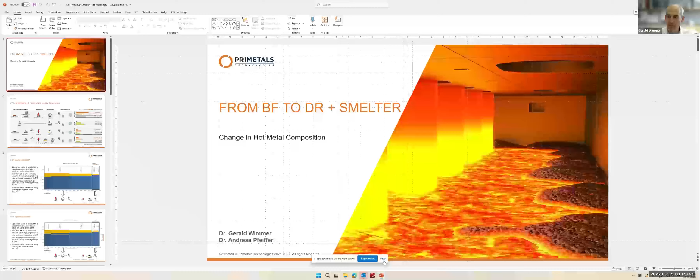Thanks, Mike, for the kind introduction. I will share my screen with you. Just a quick check—can you see my screen in full presentation mode? Yes. Excellent. Let's get started with today's topic: synthetic hot metal from the smelter.

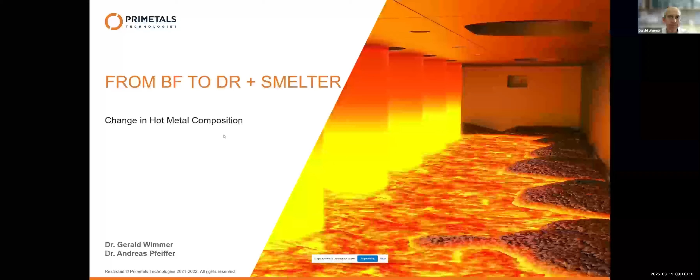As this is quite a new topic, the smelter, I think it's a good investment to spend some minutes on an introduction. Why are we doing all this? Is it getting easier? No. Is it getting cheaper? No. The only reason we are entering these new fields—and we will see later there is quite an R&D effort necessary to prove all these assumptions.

There is quite a change coming up in the steel plant, and that is the CO2 emissions. That's why I always like to start with this slide, which all of you know in one form or another, simply summarizing the ways that we can make steel. If you look at the very first line, the dominant way steel is produced today, via the integrated blast furnace route, we have to say this is the best, most efficient, cheapest way to make iron and steel, but it has very high CO2 emissions, as we can see here on the orange bars.

And only due to the move that our society has decided—and I think this is a very important move, though it's questionable if we are moving fast enough.

In order to do this move, we have to find solutions to reduce CO2 emissions. Carbon capture and storage for the blast furnace could be one option, but seems not the most promising one. That's why we end up, after recycling all the scrap available in the electric arc furnace, still using iron ore for iron production, ending up in direct reduction feeding into an electrical furnace. The common way we do this today is classical direct reduction, mainly shaft technology, feeding into an electric arc furnace.

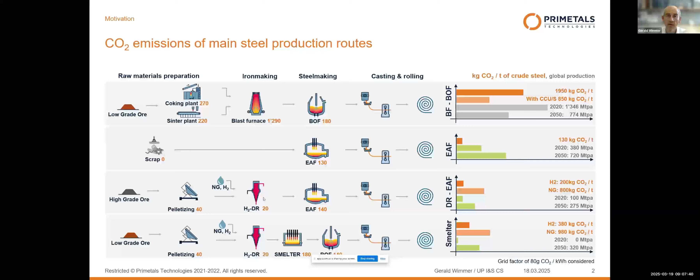Why can't we do this on a large scale? Because there is a shortage in the iron ores. This is the second message I would like to convey with you: the electric arc furnace is a proven, simpler solution to use direct reduced material and make steel out of it. But the electric arc furnace needs high-grade iron ore.

Here is a global map of the iron ore shipped around the world, an incredible amount of 1,500 million tons. On the vertical axis you can see the iron content of this ore, in yellow the gangue, and in white the oxygen bonded to the iron oxide. We see we have excellent iron ores with very low gangue content, and other iron ores of lower grade with much higher gangue content.

If we charge all of them to the same electric arc furnace, we see the very high-grade iron ores fit very well because they end up with a reasonably low slag amount of some 180, 200, 240 kilograms. While the other iron ores, mainly those here in the center, almost all the Australian iron ores belong to this section, would lead to a very high slag amount in the electric arc furnace, and high slag amount always means low productivity and low yield.

That's why today we are fine: these low-grade iron ores are used in the blast furnace, and the electric arc furnace guys use the high-grade iron ores. Also important to remember, they are willing to pay this DRI premium. So these high-grade DRIs are sold by the miners at a higher price, and there is even a market index for this. The electric arc furnace guys are happy to pay this premium because it makes the operation of the furnace cheaper.

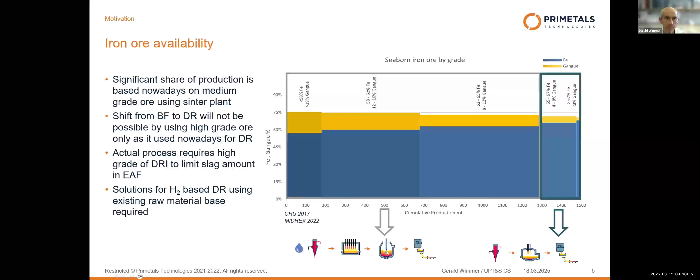For refining, we use the existing refining aggregates if available, the BOF converter. But it requires operating two aggregates.

So the last point for the introduction is a cost comparison. Does it make sense to run two aggregates instead of one? We made this process calculation, as we are a bit lazy, just for two grades: a low grade iron ore with 62% and a high grade with 67%. If we now look at gray on the electric arc furnace, we see for the electric arc furnace it's getting cheaper, my total costs, if I use high grade iron ore.

So if we spend more money for high grade iron ore, the operation costs for the electric arc furnace - mainly electricity, lime, and yield losses - are decreasing a lot. And in the end, it's getting cheaper if we use this high grade iron ore. And this, I think, reflects well what we see on the market.

There are already several plants operating direct reduction shaft, feeding directly into an electric arc furnace, and all these plants are using high-grade DRI. Basically all direct reduction plants today are producing high-grade material.

When we look now at the two-step process, smelter plus BOF, and calculate the costs for both aggregates, we see, of course, also here high-grade iron ore is more expensive than low-grade iron ores. But in total, we see that the costs are decreasing. So for the smelter, it's better to benefit from cheaper raw material. That's the principal idea of this two-step process: let's use cheap raw material and save costs here.

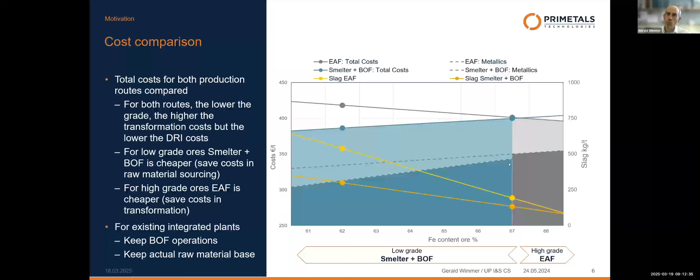What does this predict for future market prices? We see a lot of electric arc furnaces and direct reduction plants being built at the moment, so the demand for high-grade iron ores will go up in the future for sure. The price difference between low-grade and high-grade ores will increase further. That's why we predict the competitive advantage of the smelter using cheaper raw materials will increase in future. And it's not only our idea—there's a very recent paper from Australian researchers.

Australia has a lot of iron ore, and most of it today goes to the blast furnace. So for the big mining companies and shareholders, but also for Australian society, there's a big question: what's the value of our iron ore in future if the blast furnace has to be replaced by green alternatives? That's why there's a lot of R&D and demo furnaces going on in Australia. One recent paper, which you can find on the web, basically shows the same thing—that for low-grade iron ores, the smelter is cheaper than the electric arc furnace, but for high-grade iron ores, it's turning around.

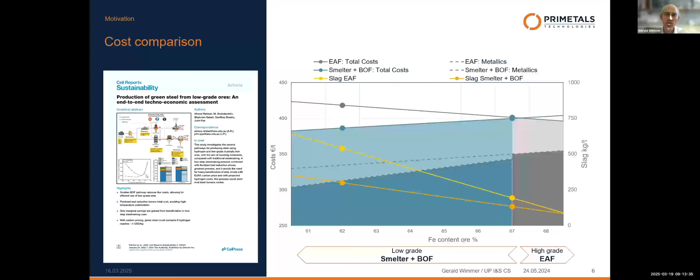That's the principal introduction—why we are developing this new process, and why we think it's necessary. Now we'd like to go into more detail and look at the result of the smelter: what material do we get out, and what is the difference compared to the blast furnace? Before that, we should look at how the material is produced in such a furnace, because this will affect the material properties.

Here you can see a simplified process picture of how such a smelter is operated. One important thing, very different from the electric arc furnace, is that we have no arc formed between the electrode tip and the metal. We have either short arcing, so-called brush arc, between the electrode tip and the slag, or we operate with an immersed electrode, giving just resistance heating of the slag. We have very big slag baths in the furnace—we need a certain slag height for the slag resistance—and a very big pool of hot metal. We charge material to the electrodes because their temperature is highest.

If we have arcing, some radiation is present and we melt more material, but we also charge material to the side walls. This protects the refractory, supports the formation of a freeze layer, and increases refractory lifetime. These furnaces are so big, holding hundreds of tons of metal and several hundred tons of slag, that it's quite an effort to drain the furnace for maintenance or relining. That's why, similar to the submerged arc furnace, these furnaces are designed with very wide baths—a big distance between the process zone, the arc, and the wall—resulting in a low refractory wear index.

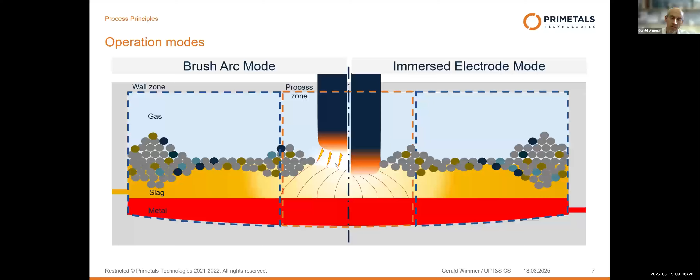Now let's go a bit more into detail—let's focus on the right side and look in detail at the melting zone.

So how is this working? The feed material is resting there in solid state. It's floating on the slag. So what the electric arc furnace guys call iceberg, and they do not like, we would like to have here. So we on purpose cover the slag surface with feed material, and then we melt this feed material with the arc and the hot slag.

By melting of the DRI pellets, we get droplets. These droplets get in contact with carbon. The carbon is charged with the DI and it's floating on top of the DI. And by this contact, the metal droplets get carburized and then sink down as carburized metal bars.

And we adjust the carbon level by the amount of carbon we add to the furnace. So the more carbon we add, the thicker is the carbon level here. The more contact we get between the FeO and the carbon for reduction, and in the next step between the metallic iron droplets that we have formed and the carbon, the more we carburize.

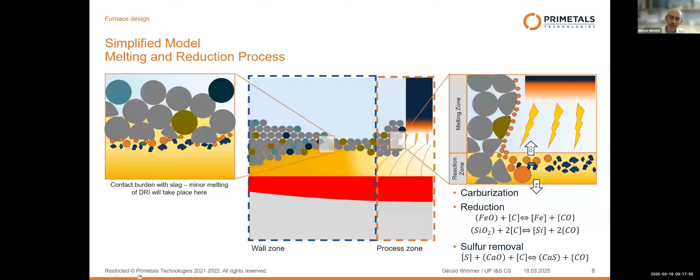So we can adjust the carbon level of the hot metal by the amount of carbon we feed to the furnace. Second reaction that's taking place is, of course, reduction. FeO reduction is easier, so this will happen first. So in principle, we will reduce first the FeO and then the silicon. But as we have very high temperatures here, there's always both reactions running in parallel. And last but not least, there is some minor sulfur removal going on.

Let's start with the first one, with the carbon. Here, a quick overview of our different carbon levels of DI. So today's direct reduction plants all are running with natural gas, having typically a carbon level of 2.5% of carbon in the DRI. And as we have a two-step process, we need a metal from our smelter that has sufficient carbon for smooth BOF operation.

And this depends, of course, on the plant. What is the hot metal logistics? What is the hot metal temperature I can still achieve to get charged to the converter? What is the final tapping target from the converter? What's the size of the converter and the specific heat losses?

Typically, we start about 3.5% of carbon. For a smooth operation, 4% is, of course, easier. And if we consider some 3.5%, then we see we need about 42 kilograms of coke to be added to the furnace. Part of it is used to increase the carbon level of the bath. Part of it is used to make the final reduction. And part of it is, of course, losses because yield is high, but not 100%.

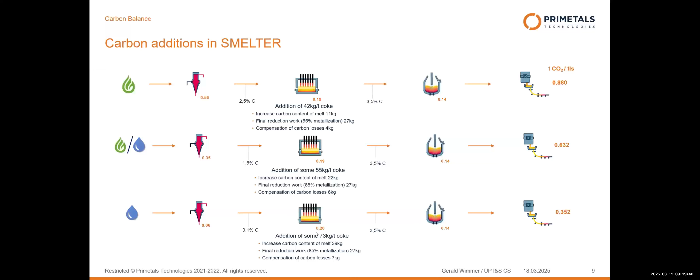And if we in future switch to pure hydrogen production in our direct reduction plant, then of course the DRI has almost 0% of carbon, and consequently the carbon amount that we have to charge to the smelter has to be increased. But regarding carbon level of the hot metal, the smelter is quite flexible, so we can adjust. What we cannot achieve is saturation, because for saturation in carbon, we would need very long contact of the carbon and the metal. And in this process zone where this carburization takes place, the reaction time or the time where we have contact is limited, so we will not have a hot metal saturated in carbon.

So compared to blast furnaces, this is the world where most of us are coming from, and this we know very well. On blast furnace, we have this burden in the furnace where always carbon is present, and the metal therefore is always saturated in carbon. The hot metal from the smelter has slightly lower carbon content than the hot metal coming from blast furnace today.

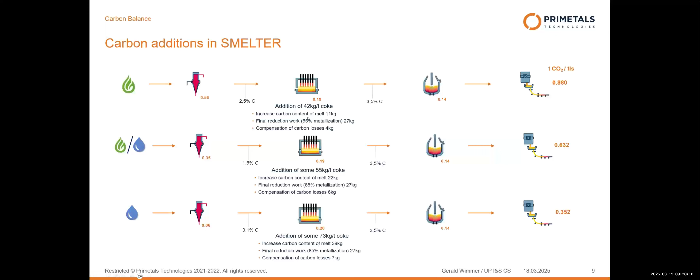What is the consequence? Just having a look at the right picture here, we have done calculations for a typical BOF converter, 0.04% carbon at tapping. Of course, the lower the carbon content in the pre-melt, the shorter is the blowing time. So while today, from this example, we had some 15 minutes pure blowing time, we would go down to 9 minutes if we just have a carbon content of 2.3%.

Might sound good for the steel plant operation because the converter is getting faster and you are more relaxed and less of a bottleneck in the production. Disadvantage is, of course, we need sufficient blowing time because we have to form the slag. We have to make sure that the dephosphorization takes place. We have to make sure that we purge all the nitrogen. So a certain blowing time we need in the converter for a stable process. That's why typically below... might get critical. And same is, of course, for scrap addition.

The less carbon we combust, the less energy we produce in the BOF converter. That means less cooling material we can charge to the furnace, so the scrap rate charged to the furnace is reduced. That's why, if we switch to a synthetic hot metal for the smelter, the scrap rate on the BOF converter needs to be adjusted.

For plants in a transition phase, operating blast furnace and smelter in parallel, this is a classical example where a powerful process model on the BOF converter makes sense—heating heat by heat depending on the raw material, whether saturated in carbon from the blast furnace, lower in carbon from the smelter, or a mixture. You can precisely calculate the amount of scrap that can be charged to achieve the tapping temperature.

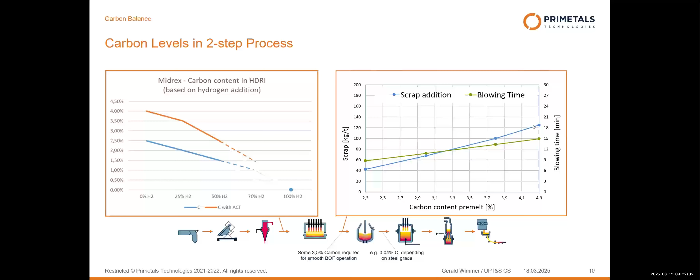We also tested this: dust carburization, a simple approach by just adding the carbon from the top.

This is a picture of our demo furnace, a small electric arc furnace with three graphite electrodes. Here you can see an infrared picture of the process, and these are the DRI pellets we charge.

This is one electrode. When I play the movie, look at the area around the electrode. We see these feed piles melting very slowly, while all the feed material getting close to the electrode melts quite quickly.

This is what I've shown before: a process zone where we have higher melting rates and high activity, while in the rest of the furnace we cover the material to reduce radiation losses and protect the refractory, resulting in a much lower melting rate.

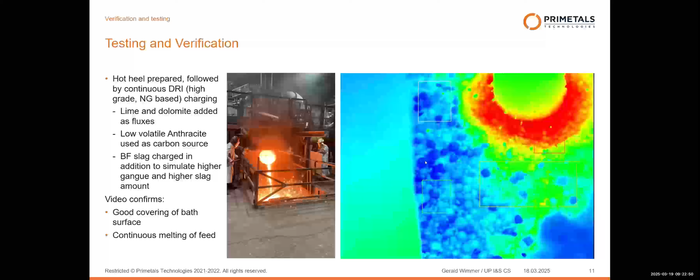So first point checked: yes, we can carburize the metal by simply adding carbon together with the DRI, and carburization takes place during smelting and reduction. It's not necessary to inject the carbon into the metal bath, which of course saves a lot of costs.

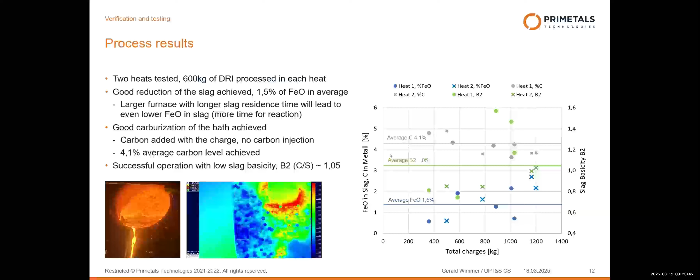Second point is sulfur. How does the hot metal from the smelter compare to hot metal from the blast furnace? There isn't much sulfur in the iron ore—sulfur mainly comes from the carbon, meaning coking coal or pulverized coal injected into the process. That's not a big difference by itself.

On the blast furnace, we need about 500 kilograms of coke per ton. On the smelter, as shown in the last slide, depending on whether the direct reduction plant is natural gas or hydrogen based, we typically start at around 50 kilograms of carbon per ton. So we have about one-tenth of the carbon added to the process, meaning the sulfur input is also only one-tenth.

The second topic is the partitioning factor—where does the sulfur go, to the metal or to the slag? We see the partitioning factor for the smelter is about half to one-third of the factor for the blast furnace, meaning due to the different reducing atmosphere and kinetics, less sulfur reports to the slag, but overall we have less sulfur input.

That's why, typically on average, we could say the smelter has about one-third of the sulfur content compared to the blast furnace.

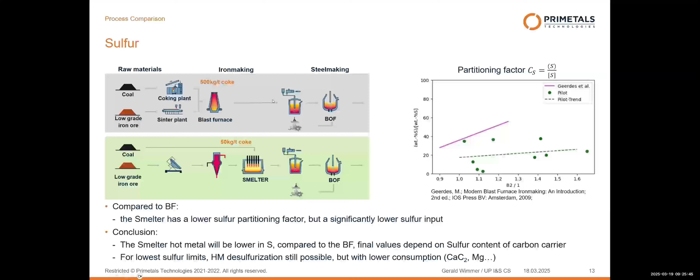Silicon, next topic. Silicon is coming from the gangue, where there's a lot of silicon oxide that can be reduced. How much silicon is reduced depends on the reduction power. In the arc zone, we have enough temperature and carbon available to reduce silicon, but there is always a competition between FeO and SiO2 - first the iron oxide is reduced, and secondly the silicon oxide.

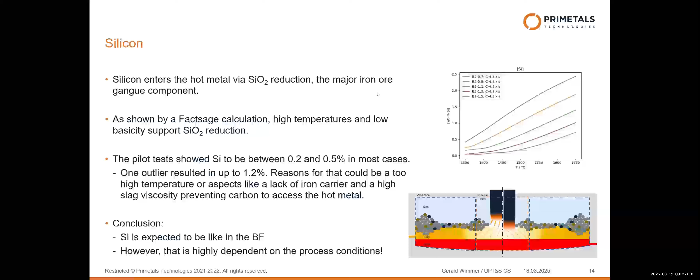The last two elements I'd like to address are nitrogen and phosphorus. Nitrogen mainly we get from contact with ambient air. Where do we have such contact? Inside the furnace we have a reducing atmosphere - the furnace is completely closed, there's no burner and only minor ingress of ambient air, so there is almost no nitrogen contact inside the furnace.

But of course, when we do the tapping - classical tapping from the tap holes, running into the torpedo cars - we get some contact with ambient air and will have some pickup of nitrogen. The maximum nitrogen content this metal can get, from a solubility point of view, is about 117 ppm. The purging of nitrogen in the BOF converter works like it does today for blast furnace, so we expect the crude steel tapped from the converter to show similar nitrogen values as hot metal from the blast furnace today.

Last point is phosphorus. For phosphorus, it depends a lot on the mineral fraction - whether reduction of phosphorus in the direct reduction plant takes place, or if these minerals are strong enough not to be reduced. Depending on this mineral fraction, we can have similar phosphorus levels to today's blast furnace, or slightly lower ones if the mineral fraction is too strong to be reduced by the direct reduction plant, which has a much lower reduction power than the blast furnace.

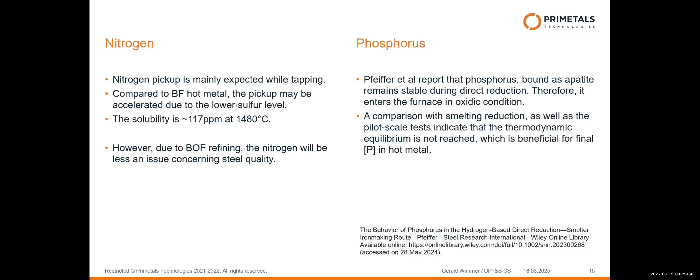I hope I could provide a brief overview of what we expect from the hot metal coming from this new furnace. Quickly summarizing: this metal is rich in carbon but not saturated. That's why we struggle to call it hot metal, because hot metal is defined as metal saturated in carbon. That's why, for the title of this webinar, we decided to call it synthetic hot metal, with the main difference being slightly lower carbon levels than blast furnace - though we can decide the carbon level. Silicon level is similar to blast furnace, sulfur level lower than blast furnace, and nitrogen and phosphorus levels similar to blast furnace.

If there are any questions, I'm happy to answer them.

Giving a very good overview of the smelter, melter, or electric smelting furnace process. Today the topic of the talk is understanding and optimizing the properties of what we call synthetic hot metal in electric smelting furnace - that's what we refer to this equipment as. Gerald has done a very good overview of why this process exists and where it fits in the value chain, but I'll just do a quick recap.

Traditional steelmaking is done in two major pathways: integrated steelmaking, which uses lower grade iron ore - whether it's sinter, lump, or BF grade pellets - plus coke, turned into iron in the blast furnace, goes through basic oxygen furnace steelmaking. Again, using widely available iron ore, but unfortunately coming with quite a bit of GHG emission cost.

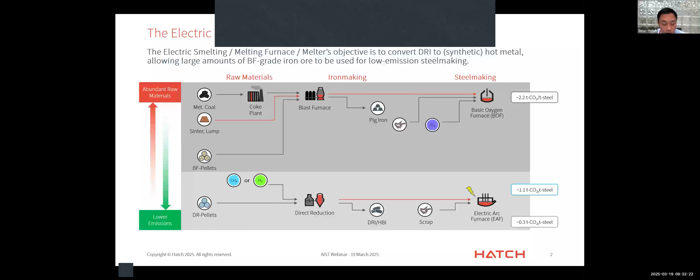On the other hand, you have the mini mill based steelmaking routes, using high quality raw materials such as DR grade iron ore, as well as scrap, and using lower emission reductants such as natural gas or hydrogen, making DRI, whether it's hot charge or not, turning into steel in the EAF steelmaking process. Much lower emission, but unfortunately has some constraints, whether it's the availability of low emission reductants, but more importantly, availability of high quality iron ore in particular, which is quite well understood.

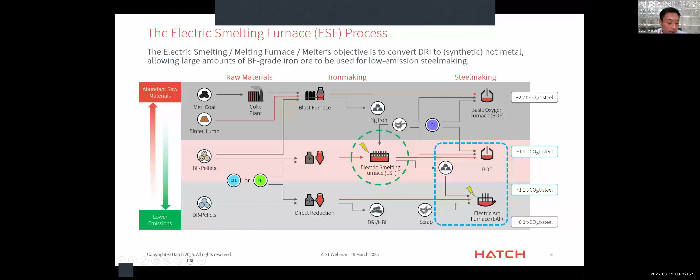Where the ESF fits in is sort of a third way, a middle path. It uses widely available, typically BF grade iron ore. Today it's mostly in the pellet DRI form, but certainly sinter fines, fluidized bed-based iron making processes are compatible as well. Using electric smelting furnace, or smelter, or melter, or electric melting furnace, turning into hot metal, or sometimes referred to as synthetic hot metal, or green hot metal, for use downstream in steelmaking. That can be used as hot metal inside the BOF, or can also be turned into pig iron for use in the EAF.

The hot metal doesn't discriminate. Again, coming up to a comparable level of emission as EAF steelmaking, but using much more widely available iron ore, therefore realizing cost savings and unlocking value-in-use benefits.

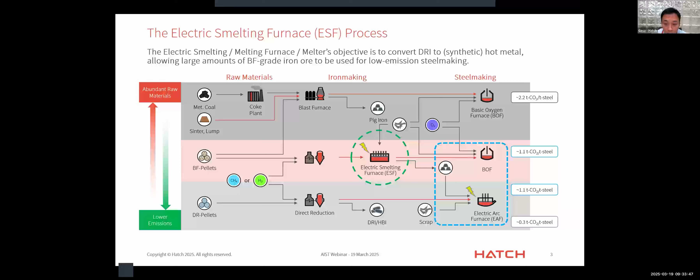So I'll go straight into the chemistry components. When we talk about hot metal chemistry, the four biggest factors or elements we usually talk about are carbon, silicon, phosphorus, and sulfur.

Carbon and silicon, of course, provide energy, whereas phosphorus and sulfur are more quality factors impacting steelmaking. Both carbon and silicon provide a lot of energy, and carbon especially is a primary energy source for BOF steelmaking, allows higher scrap use, does a lot of the refining in the BOF, and has a lot of benefits when used in the EAF as well, whether it's energy benefits or allowing effects like slag foaming to improve the quality and efficiency of steelmaking.

Phosphorus and sulfur, on the other hand, are impurities that need to be removed. They come from different sources, but all of it needs to be removed for steel to finally meet the quality specifications. Silicon is an interesting one because it provides energy, which is good - some BOF operators prefer to have some silicon to allow higher scrap usage. But because SiO2 is a slag component whereas CO2 is a gas, using silicon as an energy source in hot metal unfortunately generates a lot more steelmaking slag. That's actually one of the reasons driving why EAF efficiency comes down significantly with the presence of gangue material like silica.

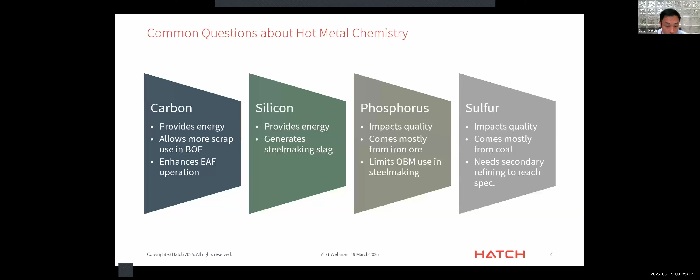So we'll go into a little bit about the fundamental drivers for the differences in hot metal characteristics. I think the first is a little bit more philosophical - as we explained earlier, it's a DRI process plus an ESF to replace an entire blast furnace. The virtue of simply separating an entire blast furnace process - everything from preheating of the burden, reduction, melting, and separation - into two separate processes allows independent control of those two separate processes.

Now, in the DRI shaft furnace, the preheating is done, majority of the reduction and metallization is completed, and the hot material is charged into the ESF, where it undergoes complete reduction, metallization, melting, and separation into two different phases. So if you want to do all of these processes inside the conventional blast furnace, it requires very careful and simultaneous control of all these various parameters to make your hot metal on spec.

The DRI ESF separation into two separate processes allows better independent and separate optimization of each process, giving you more control and opportunities to optimize and control the quality of the hot metal that's otherwise not possible inside a conventional blast furnace.

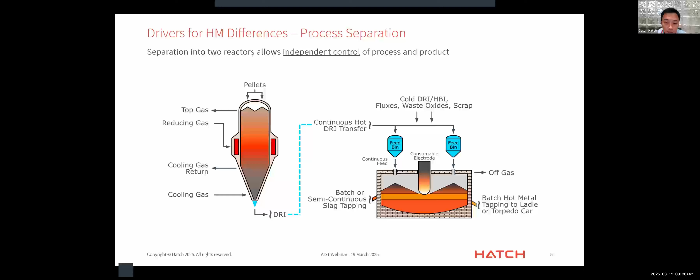The ferrous material typically used is very similar, typically lower grade ferrous burden, like BF grade pellets. That's because both the blast furnace and the ESF are excellent at handling large amounts of slag and very effective at rejecting the gangue and completely metallizing the hot metal, whereas the DRI process does not reject any gangue and does not completely metallize the ore.

Again, similarly, both the blast furnace and the ESF have a lot of process advantages. They're both continuous operations, have very high availability, and extremely long campaign life as measured in a number of decades.

Of course, there's a lot of differences as well. The big fundamental driver is the difference in the source of energy. Whereas blast furnace is predominantly chemically driven, it's coke and hot blast and PCI or whatever energy source you inject into the furnace, the ESF is predominantly electrically powered.

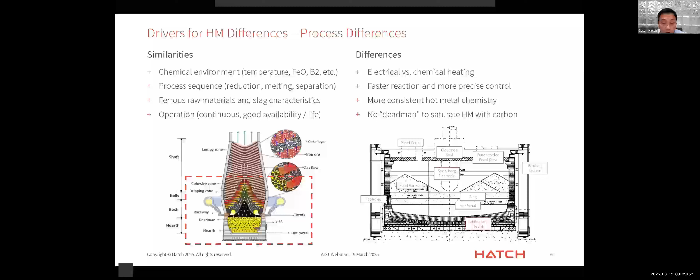So a little bit more about the background of this process. What does all this understanding of the process and hot metal quality and slag engineering come from?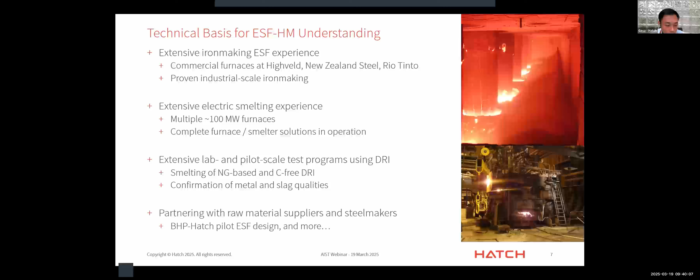This is not a very well-known fact in the steel industry, that iron making electric smelting furnace has been around for many, many decades, since the beginning of the 20th century. Hatch has supplied many of these furnaces, operating for the past 50, 60 years or so. There were, and still are, a lot of commercial electric iron making furnaces around the world: Highveld, New Zealand Steel, and many Rio Tinto furnaces out there.

What this proves is that electric smelting furnace iron making is entirely doable on a commercial scale and can reliably operate and produce hot metal that's on spec, at the right level of consistency and reliability for a commercial iron making furnace. Through all these experiences, we've dealt with a variety of different iron ore feeds, slag chemistries, and product specifications, so we do understand how electric iron making process control and the quality of the iron produced from it, and how to control it.

Second, beyond just iron making electric furnaces, large furnaces, by large I mean probably close to 100 megawatt furnaces, are very widely used in the ferroalloy and non-ferrous applications. These are scale-wise equivalent to about 1.5 million tons of feed throughput a year, which is at the scale that the steel industry needs to apply this solution.

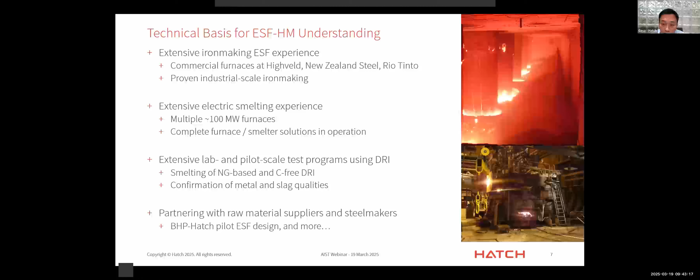Here's a quick summary of what we think a typical ESF hot metal looks like compared to typical blast furnace hot metal. Synthetic hot metal is better than conventional hot metal, just like synthetic motor oil is—though there are certainly differences, so I'll echo Gerald's presentation. Hot metal carbon is probably the most obvious difference: it's not going to be saturated like blast furnace hot metal at 4.5%, but certainly in the high threes and even low fours is achievable and has been demonstrated. Silicon level on average is comparable to that from the blast furnace, but we expect it to be a much more consistent level.

Things like sulfur, we expect to be much lower, by virtue of simply having much less sulfur load in the input. And slag rate—I think it's a very important one, although it's not part of hot metal, it does affect everything about hot metal quality. As we know, in most processes, once you fix the slag, the process tends to run itself fairly well. When we use typical BF grade iron ore, depending on the acidity of the pellets and the fluxing strategy, the slag rate is in the order of 100 to 220 kilograms per ton of hot metal. But when you use higher grade DRI, that number can become well below 100 when we use DR grade DRI in this application.

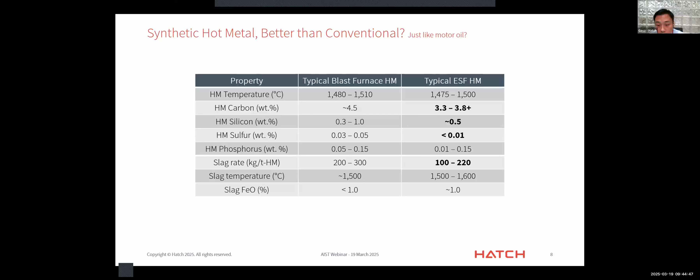So we'll go into a little bit of detail on each of these elements—not the exact dynamics, but more about the practical experience we've gained working these furnaces over the decades. I think the number one question, of course, is carbon. Without a dead man, ESF hot metal is not expected to be fully saturated. But our tests have demonstrated that when we use typical commercial grade DRI, achieving well above 3.5% carbon hot metal is doable. We've been testing a lot of proprietary technologies and furnace design tools to enhance that, and some have proven quite effective, so 3.5% or more is certainly achievable.

On the matter of silicon, the general conventional thinking is that a higher arc temperature will likely encourage the reduction of silica to recover more silicon in the hot metal. But based on our experience, unlike the blast furnace, the correlation between hot metal temperature and silicon in the hot metal is not as strong. It's possible to very precisely control the silicon content in the hot metal through precise feed and slag practice control engineering. Depending on end user preference, it can be adjusted—for example, creating a higher silicon hot metal for BOF to use more scrap, or much less silicon to allow easier dephosphorization downstream. All of these are possible. In general, the silicon content is comparable to blast furnace, but the much more consistent level is what really provides the benefit.

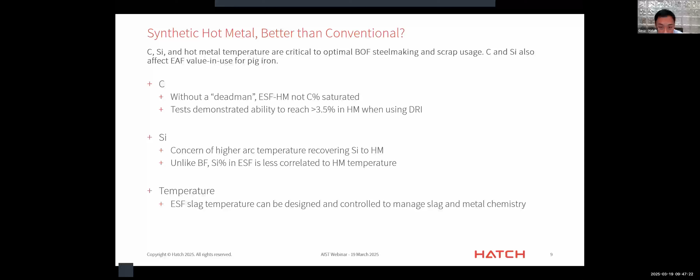A little bit more on the sulfur and phosphorus side of things. Sulfur removal capacity of the ESF is comparable to the blast furnace in general, depending of course on precise slag engineering. The net input of sulfur is significantly lower, so we expect the sulfur content of the hot metal to be significantly lower than that from the blast furnace. Of course, this is subject to the choice of reductants, additives, and reverts added to the electric smelting furnace.

In general, it will be much lower and require less desulfurization, and for some less stringent grades of steel, desulfurization may not even be necessary. Phosphorus is similar: removal capacity is comparable to the blast furnace and highly dependent on ore selection. Dephosphorization is a strong function of both temperature and slag property, and since we can control those parameters precisely, it provides a lot of opportunity to enhance phosphorus recovery through optimizing both the slag and the process. For example, can we make very low phosphorus pig iron for the EAF from relatively higher phosphorus ore? All of these are applications that can be precisely engineered through process design and slag engineering.

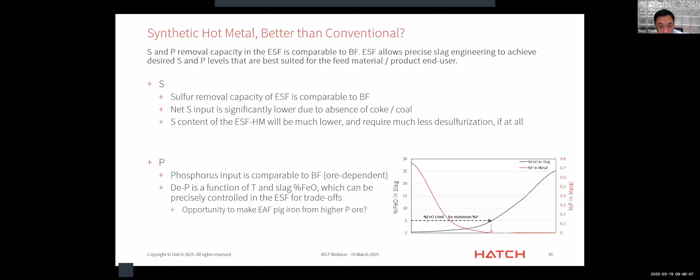I'll stress a bit more about process control. Hot metal optimization and the use of synthetic hot metal is beyond just chemistry. I'd like to emphasize the ability to directly control the process, intervene on the mass energy balance, and improve the overall consistency of the hot metal, and the benefit that brings to the melt shop, hot metal, and BOF or steelmaking. The mass and energy balance control of the ESF is much easier than the blast furnace, which is usually limited by the burden recipe and fuel rate control, and often comes with significant emission impacts.

The separate tapping of metal and slag in the ESF also eliminates slag carryover, an additional benefit. One thing often overlooked is scrap addition: the ESF can be designed to take up to 20% scrap by charge. That will of course impact hot metal quality, but it may deprioritize the need for fully carbon-saturated hot metal. If you can use 20% scrap in the ESF, is there really a need to get a 4.5% carbon hot metal to melt additional scrap?

Is there an optimization opportunity where you use more scrap in the ESF and have a lower carbon hot metal for the BOF, allowing blow time to come down, for example? There's a lot of opportunity to optimize the overall operation based on the characteristics of the hot metal we produce and our ability to control it.

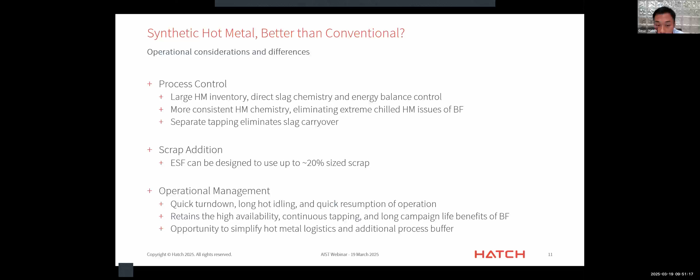And of course, the large hot heel inside the ESF allows hot metal inventory to be built up or drawn down, adding an additional layer of process buffer and an opportunity to simplify hot metal logistics if needed.

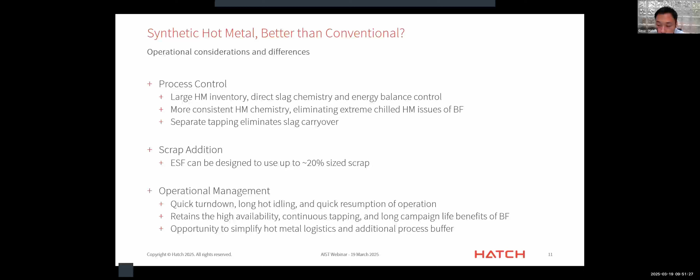So let's take a look after the ESF itself. Just like the blast furnace, the ESF hot metal or synthetic hot metal can undergo post-tap treatments, like hot metal pretreatment—a very mature technology, making it possible to reuse whatever assets you currently have for a blast furnace. One example is a system we provide, integrated as our overall furnace solution: single-stage and multi-stage refining, where inside a hot metal ladle you can adjust sulfur, silicon, phosphorus, and carburize as needed, in a single stage or multiple stages. These are very mature technologies.

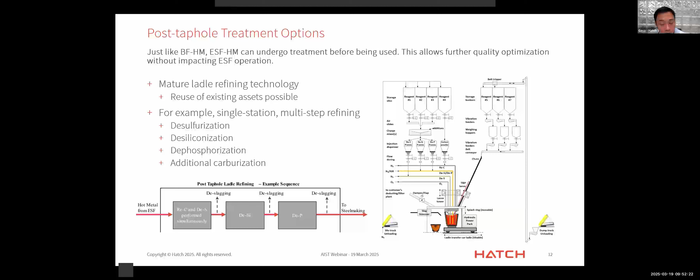It offers an additional lever to allow you to optimize your overall process, from the selection of the ore to how you run your DRI and ESF plants, and additional lever adjustments you want to make before it goes to steelmaking. This is what a typical system looks like, if you haven't seen one of those.

Quickly concluding, three overarching comments to make. One, synthetic hot metal or ESF hot metal is pretty much the same as conventional hot metal, with slight changes in chemistry. Just like steelmaking needs to adjust for blast furnace variations, it needs to adapt to and learn to use ESF hot metal effectively to achieve the right optimal point of operation. It's no different from how you typically adapt to a different operation.

But the main benefit of using ESF hot metal from an operations perspective, in addition to quality, cost, and emissions, is the consistency of that hot metal quality, coming from the powerful ability to carefully and rapidly control the operation inside the ESF. Separating the DRI process into an upstream process does not directly impact hot metal quality in operation. It's a very flexible process, can be designed for a variety of feeds to provide a wide range of hot metal specifications, and allows the opportunity to fully optimize your value chain from ore to DRI to ESF, with possible pretreatment and steelmaking operation, to unlock all the value and maximize value in use. It's a very mature technology.

Synthetic hot metal is the new normal for high efficiency, high quality, and lower emission steelmaking, and it fits very well into both BOF and EAF steelmaking processes. The limit is only imagination in how you can use this versatile process: replacing a blast furnace, producing pig iron for the EAF, recycling waste, slags and fines to replace sinter plant capacity, for example. These are all quite possible and can be engineered for.